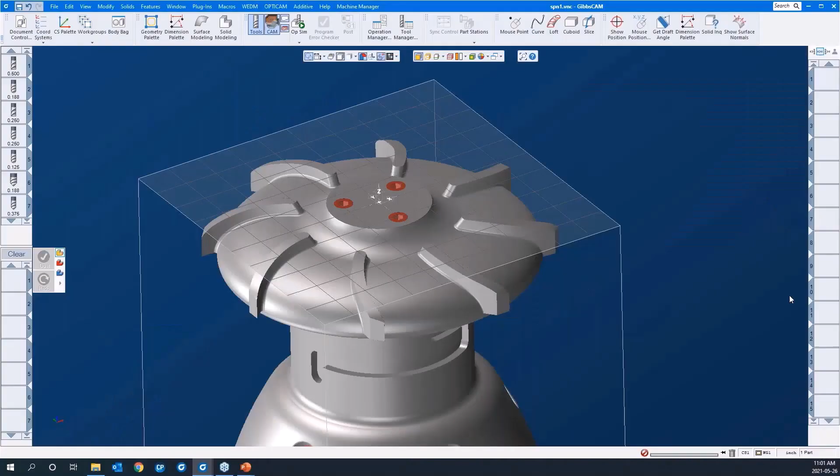We're going to be looking at the 5-axis module today for simultaneous machining in GibbsCAM. Let's open up a 5-axis process to start. Before I create a toolpath, we'll just look at the process dialog for the 5-axis module.

This is the options tab. It has your speeds and feeds, and you can duplicate and rotate toolpaths, which CS you're going to be machining in. GibbsCAM 5-axis supports 3D cutter radius compensation, so you can adjust the toolpath at the machine for size.

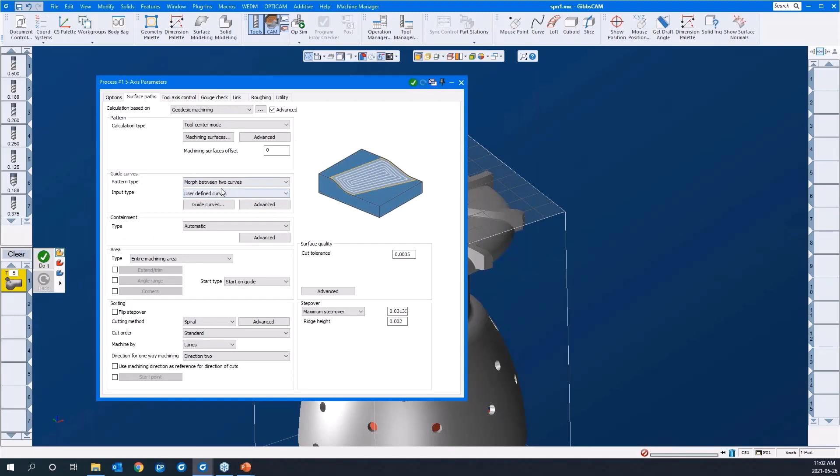If I click on the surface paths, you'll see that GibbsCAM is very graphical in the 5-axis module. You'll see any field I click on, a diagram appears to let you know what the system is expecting. And that's right across the board, almost any field you click on. So it's very graphical, and it's a joy to use.

Okay, you'll notice I'm in tool axis control. And we'll be machining in full 5-axis simultaneous. You can also go 4-axis simultaneous, or you can lock both rotary axes and machine in 3-axis as well, in XYZ. So we'll be looking at that as well.

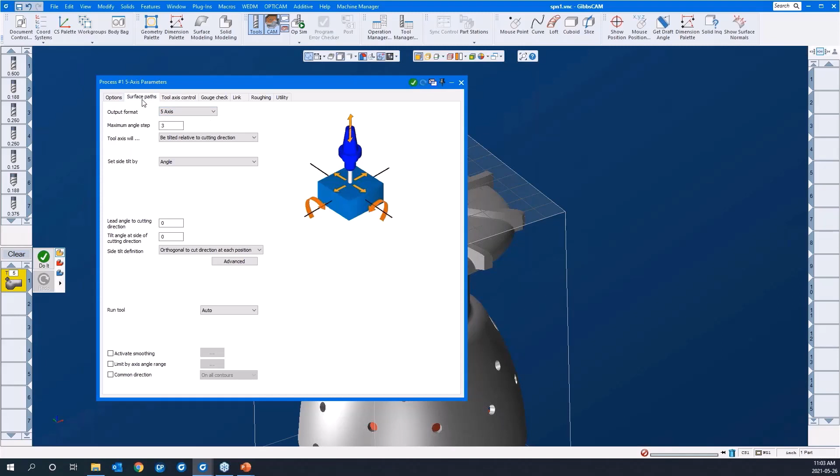Also, there's a lot of power to the 5-axis simultaneous machining strategy in GibbsCAM, and a lot of depth to it. If I just go over my calculation based on, if I'm selecting surfaces, there's a series of sub-options here for different toolpath options. If I select triangle mesh, you'll see there's another subset of toolpath options. And if I go to wireframe, you'll see likewise.

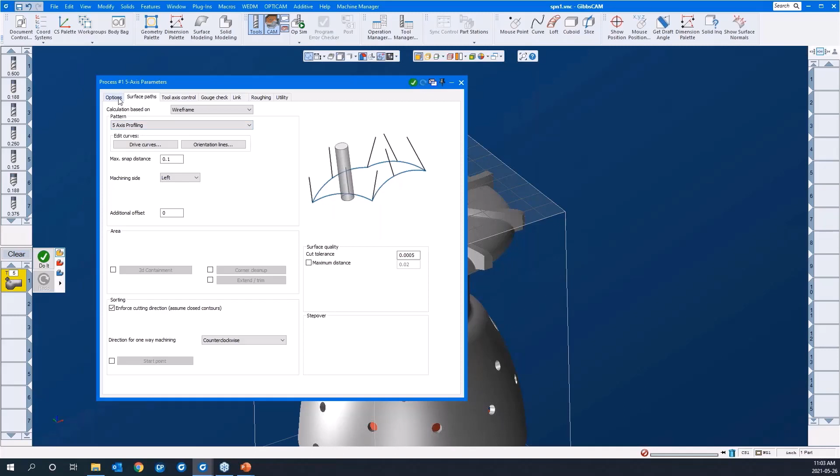So there's very many options here, okay? And we're going to cover a few of them here today. If I go back to options, you'll see there's a whole other set of toolpath options here as well. They're pointed 5-axis strategies, and we'll look at least at the drilling one today.

Let's go ahead and create a toolpath. Okay, so our options tab is good. We're set like this. I'll go to surface paths, and I'll select surfaces to start. We'll go morph between two curves. I'll just select the first curve like so.

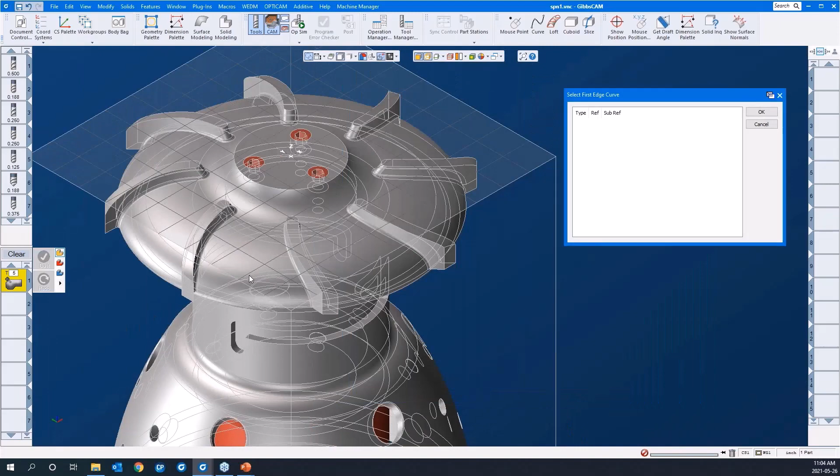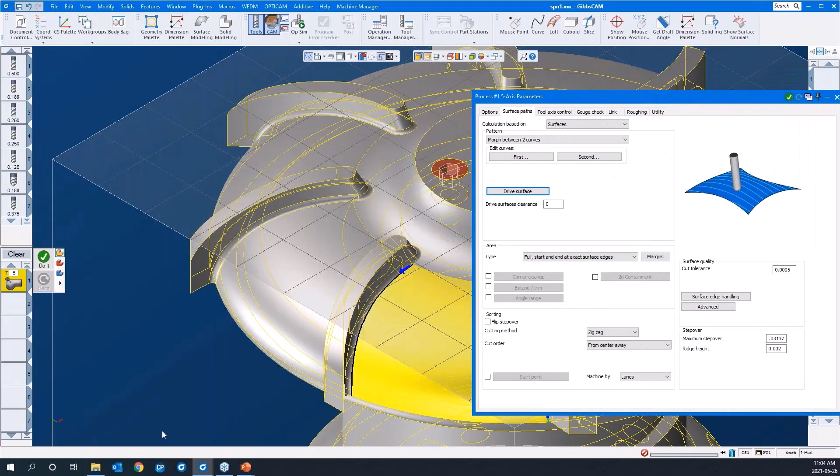And I'll say okay. The second curve will be in here. And then the drive surface, the surface we're actually going to be machining, is this one. So those morph curves are containing the toolpath, and we're going to be machining onto the yellow surface here.

Start and end at exact edges, meaning the tool is going to travel right up to these morph curves that we've selected. But if we did that, it would perhaps overcut. So we can go to margins and add the internal tool radius, which is the radius of the tool we're using, which in this case is an 1/8" ball mill. So that'll shift the toolpath over by that amount.

We're going to cut a zigzag toolpath, and we'll just use a standard. So it'll go from the left or right based on our decisions. There's the machining tolerance. We'll keep the step over rather coarse while we're developing the toolpath. It'll calculate quicker. And once we're happy with the toolpath, we can tighten up our step over to create a nice surface finish.

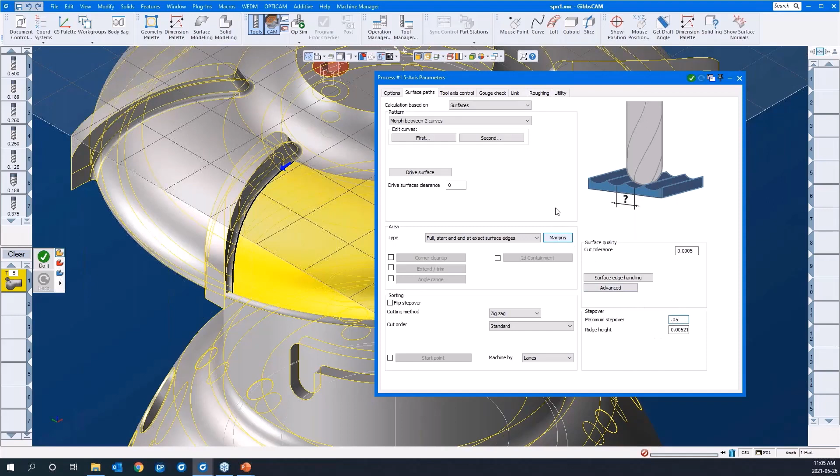In tool axis control, we'll select full 5 here. There's dozens of options to control the tool axis in relation to the surface it's cutting. By default, the tool axis wants to stay perpendicular to the surface it's cutting. And for many reasons, you can alter that by adding a lead or a lag angle or a side tilt as well. And we'll discover them as we go.

The gouge check protects the part from the flutes where required, or the shank of the tool, or the arbor as well. We'll come back and look at that where required. We typically only apply gouge check strategies once the toolpath is created and we see that there's a problem, when we need the tool to move away from any given feature.

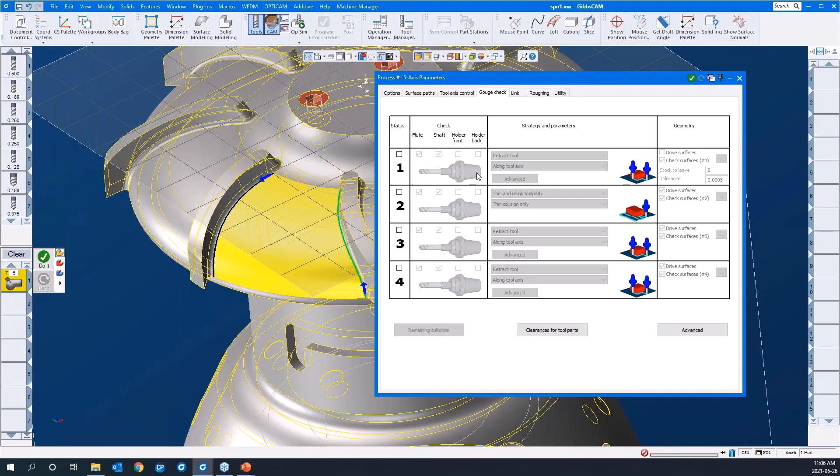The link tab is a very important part of the 5-axis module. These are important components of the toolpath. This is our first entry and last exit, okay? So the lead in and lead out. Gaps along cut are very important, okay?

What is a gap along a cut? Well, this diagram kind of displays that. If the system encounters a gap, do you want it to go direct or follow a surface, or it can blend spline, or it can start retracting to different feed or rapid moves as well, okay?

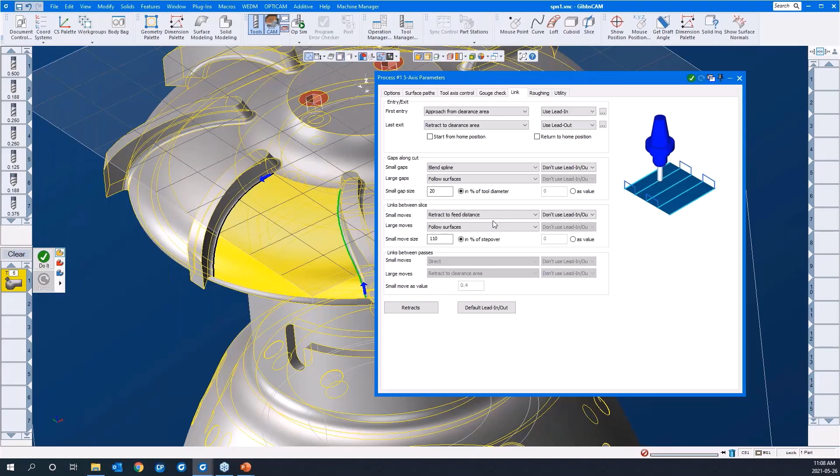And then you can differentiate between a small gap and a large gap and have the system behave differently based on those. Another one that's quite important is these links between slices. Well, what is a link? A link is the little piece of toolpath that joins the entire process together. So if you have a zigzag toolpath, there's a little piece of toolpath that links it together, and that is called the link as well. So you can go direct if you choose, or again, some of the similar options. If it's a far distance, you can have it retract to a feed distance or a rapid distance, and so on and so forth.

Okay, again, you can differentiate between a small move and a large move. A small move, you may just need to follow the surface, but if it's a longer distance, you may want it to retract to a clearance area. So there's many different retract options, and they're all defined in here, their depths, okay? There's clearance area, which is the initial clearance plane. There's also a rapid entry and exit, and then a feed entry and exit, and then a rapid distance here as well. Okay, and we'll explore these as we go forward.

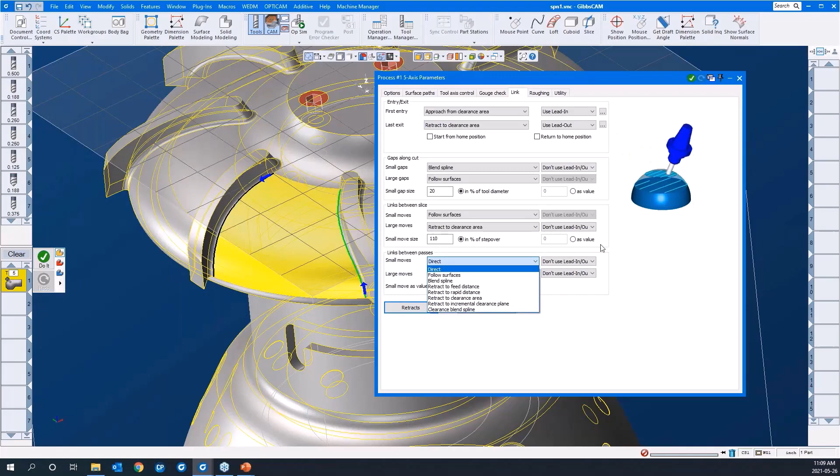There's also a roughing tab. By the way, in the link tab down here, links between passes, you can do multiple passes, and then the same options appear here for how to get the tool from the end of the first pass to the beginning of the second. It's grayed out right now because we don't have any roughing strategy selected. If we come here to roughing and click any one of these, go back to link, you'll see that it wakes this up. You can see the different pass levels here.

Okay, so to create our toolpath, we have our edges selected, like so. We're taking 50,000 step overs. Our tool axis control was full 5. We had no gouge check strategies on. Our link tab, links between slices, I was just going to say follow surface and follow surface in both instances. Let's go ahead and create that toolpath. Okay, down here in the lower right is the progress bar. There's a little thumbtack there. I like to keep this open during my session so I can see how long it's taking for toolpaths to calculate.

Okay, so there we are. You can see there's the shift from the edge. That's the internal tool radius. We have a lead in and lead out option selected here, so I can modify those. If I go to the link tab, yes, we're using lead in and lead out. If I go to my default lead in and lead out, I can modify them here. Vertical tangent arc, I'll make them a little bit bigger like that, and I'll shift it over to the lead out just by clicking that button. I'll say okay, and we'll just hit the redo button.

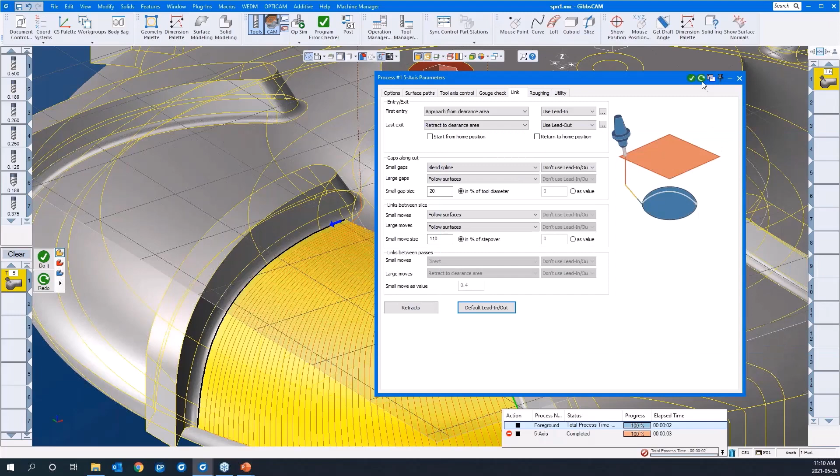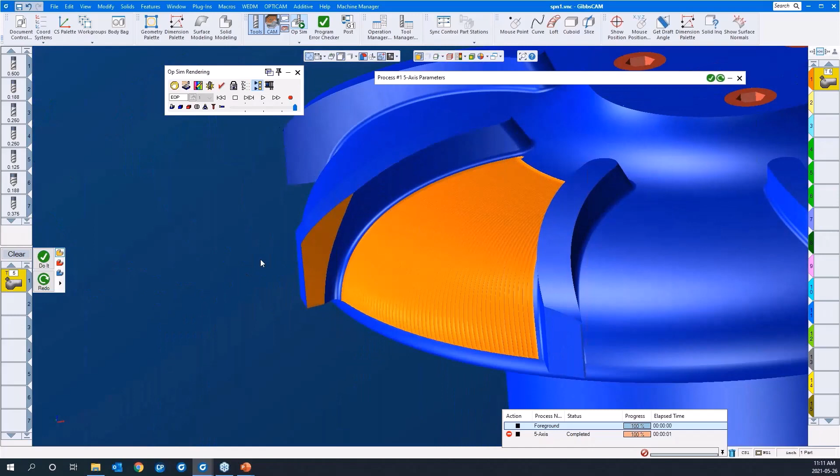Okay, let's run the simulation here and have a look-see, and away we go. Okay, so this is OpSim right here. You can see right out of the gate that it has offended the blade there. And the step overs are rather coarse here. While we develop the toolpath, I'll keep the step overs rather coarse, and then we'll clean them up as we go. We'll see how it behaves coming up to the side of this blade here. Okay, so it seems to be clearing that one. This is our problem right now.

So we'll add a gouge check strategy here. I'll go to gouge check. I'll select it. I'll check the flute and shaft. Okay, there's three main gouge check strategies. Retract tool: you can retract the tool along the tool axis, along any of the machine axes, or from any reference point you choose. It's quite versatile that way.

The next main one is you can tilt the tool. You can use a side tilt, which is a tilt angle perpendicular to the travel of the tool. Or you can use the lead lag angle, which is along the length of the cut as well. Or you can let GibbsCAM take over and say, do automatic. Well, in our case, we'll go side tilt. We're gonna have the tool tilt perpendicular to the direction of cut. The parameters are, you can limit it to a maximum of 90 and minus 90. We'll just leave that as it is.

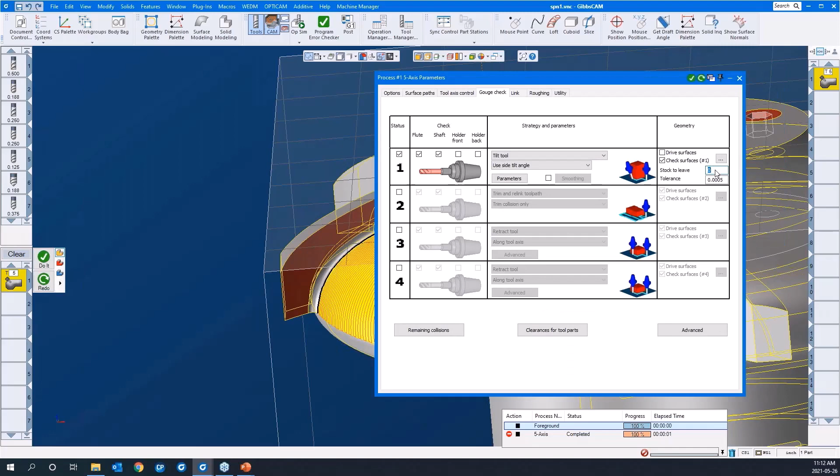What surface are we gonna check? I'll just pick here and select the surface we wanna protect, is that one. We'll say okay. And we'll leave an amount on there. We're gonna have it miss by, we'll say 50,000. I'll say redo.

And you can see there's a little jog in the toolpath, and let's look at the simulation. See how that behaves. I'll slow it down a little bit, hit play. So it comes down and you can see the tool is actually missing there. Okay, while it's running simulation, you can single block it at any given time. You can put the tool holder on there as well.

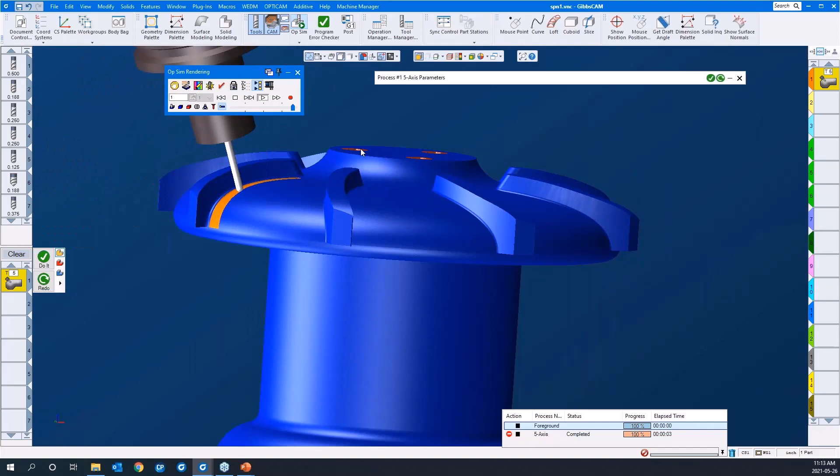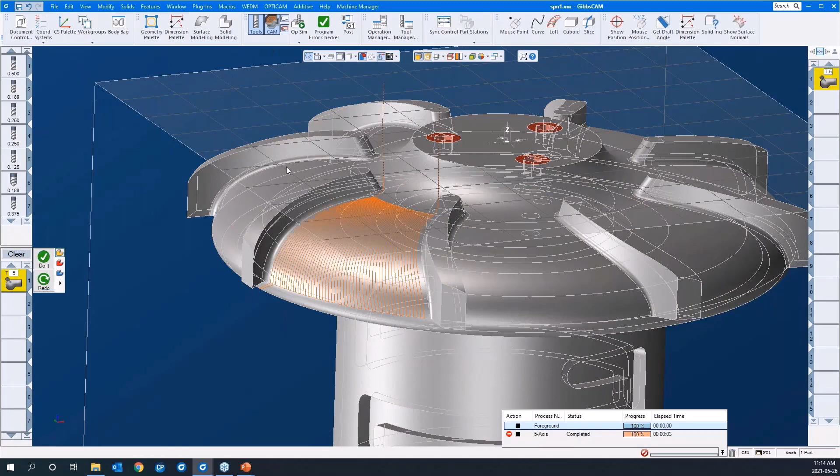Okay, and as we go through and I show you the 5-axis, I will describe some of the features available in OpSim and in machine simulation as well. Okay, so we're milling with the end of the tool here. A lot of the 5-axis module is end milling, but there's a very important component to 5-axis, and that's side milling. Swarf milling they call it, side wall axial relief feed. So let's do that. We will side mill one of the blades here.

Okay, in this last toolpath, I used the edges of the solid to select. You certainly can do that, but you can also use geometry that you have extracted from the solid. And I can do that in this case here. I'll create another 5-axis strategy. I'll use the same tool. Cutter comp is on by default. I'll turn it off until required. Surface paths. This time we're going to go swarf milling.

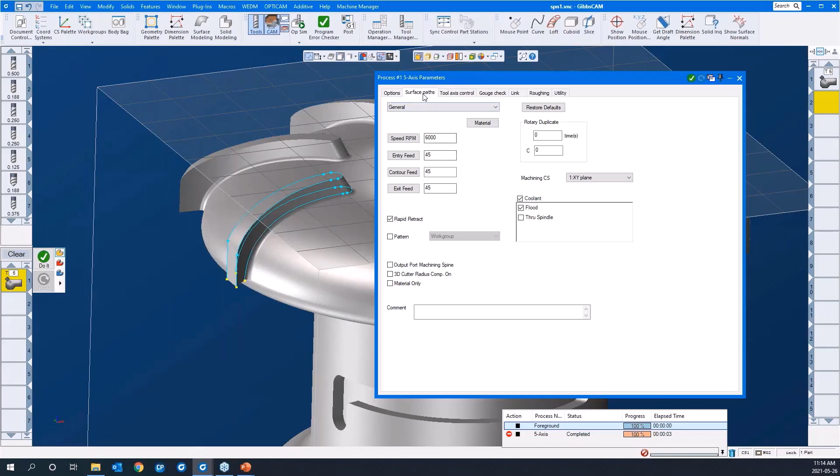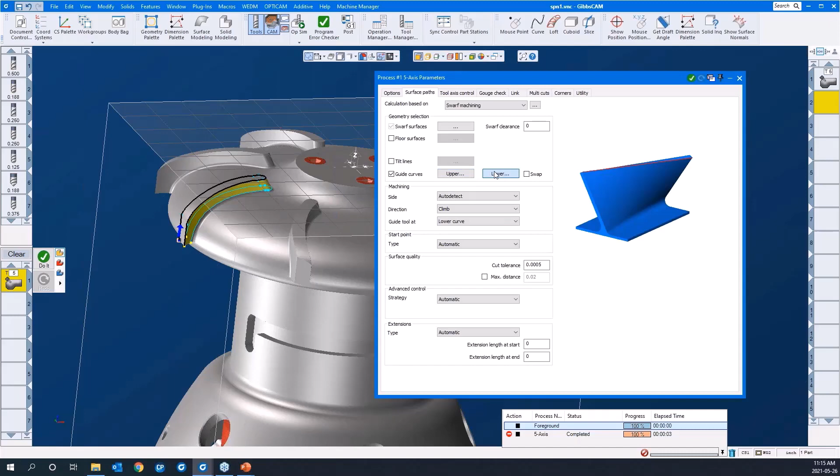Our swarf surfaces will be the walls of the blade. This one. Like so. I'll say okay to that. Okay. We'll use guide curves, which is the geometry. The upper curve will be the one on the top of the blade. And the lower will be this one. Okay. I'll say okay.

The system will auto detect which side of the surface it should cut on. It's going to guide the tool at the lower curve. The start point is predetermined. We can change that. There are our machining tolerances again. That affects the quality of your toolpath. Advanced control, we can let it go automatic, or in this case, we're going to sync the toolpath with the upper and lower curves. We can add an extension on the beginning and end of the toolpath.

We'll look at that. Under tool axis control, full 5, yes. Gouge check, we'll just leave it as it is. It's going to check the guide curves already. Okay, there's a lead in and lead out already defined here. We can remove them. If we say no lead in, lead out, you'll get an axial entry and exit. So just a straight line in. And you can do it in multiple passes. We're going to do it in one pass here. I'm going to say do it.

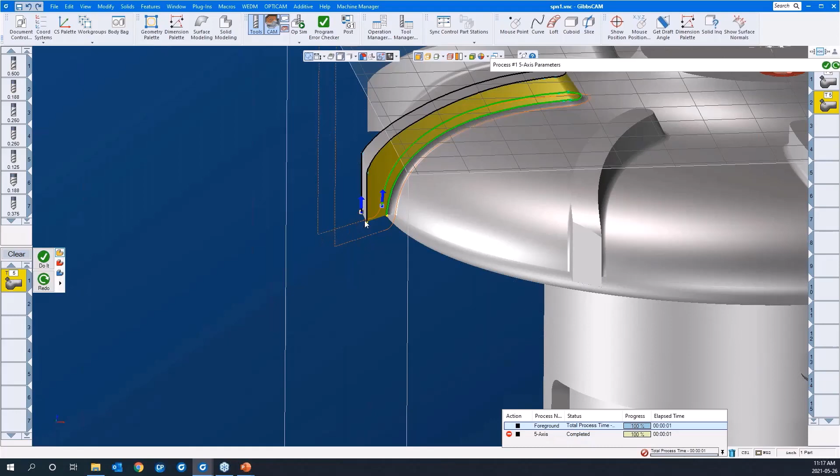Like so. There's a clue when you're developing 5-axis toolpaths on the entry and exit line. These lines right here. With a bit of practice, you'll understand that this represents the axis of the tool. So it gives you a clue as to how the toolpath is going to approach and leave the cut. Let's have a look at this one. I'll just turn off the holder. Sometimes it's nice to have it. Other times it might impede your view a little bit. Something like that.

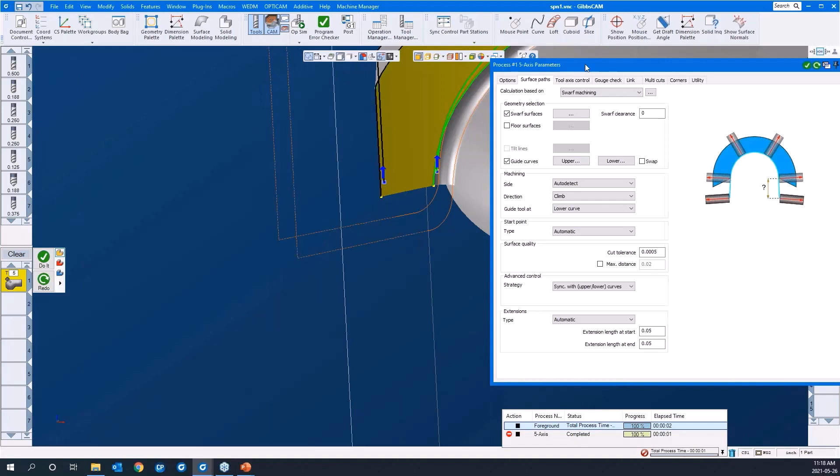Okay. You may consider extending the toolpath a little bit here. I'll go back to surface paths, extensions, the start and end. I'll just extend it by 50 thou at the beginning, and that same 50 thou at the end. I'll just say redo. You can see the difference there. At any time, and I'll do it on the next toolpath, you can duplicate and rotate that around. There's no need to go around to each blade and do them separately. You do one and then you copy, rotate it around, like in other environments in GibbsCAM.

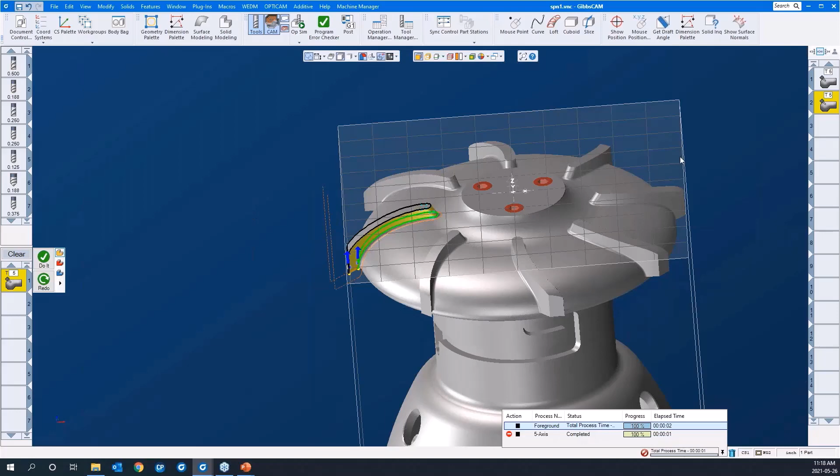Okay, let's go back to Op1. We were saying that it's a full 5-axis strategy, absolutely no problem. But you can also lock a rotary axis or lock 2. So let's look at reusing the data that we did for Op1 to cut the top of the blades. To simplify my view here, I can turn off the grid and the stock cube. Let's go in and modify the data in this process dialog to do some 3-axis milling. It's basically going to be a 3D toolpath option, XYZ.

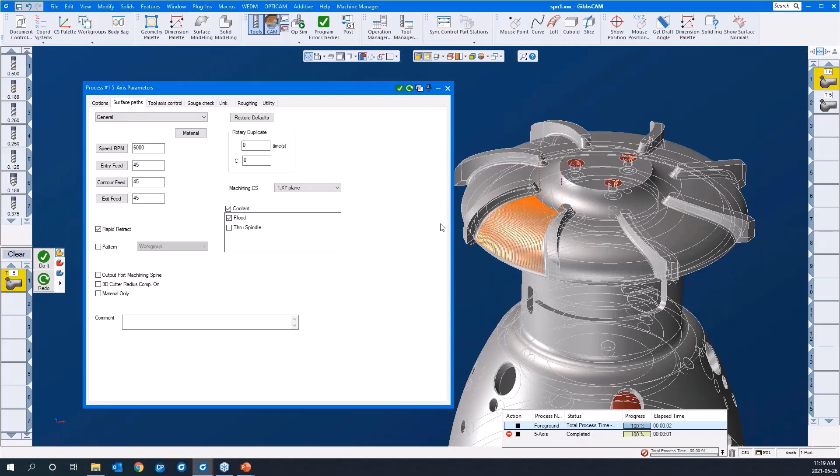I'll go to surface paths. And we'll select morph between 2 curves. The first curve will be this. And I'm picking wireframe from the solid again. The second curve, this one. Like so. The drive surfaces in this case will be these 2. We'll start and end at exact surface edges, except this time I'll remove the margin option so that the tool does go right to the edge and doesn't stay off it by the radius of the tool.

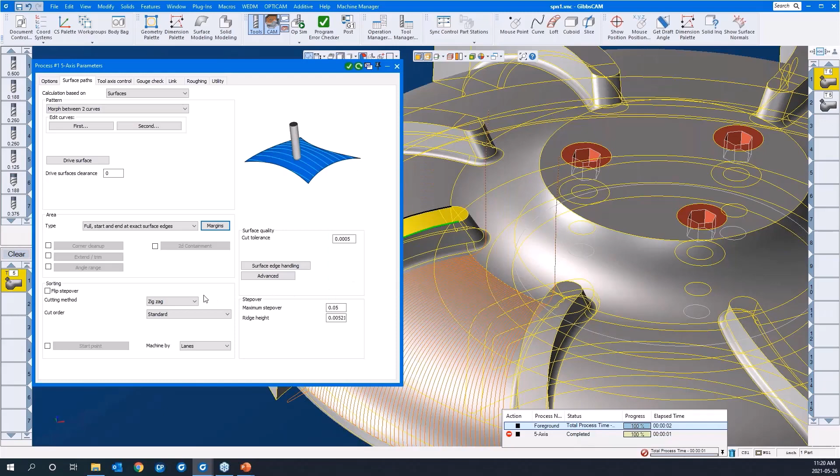I'll say okay there. We're zigzag machining. I'll set the step over to 25 thou. Okay, so you can do it by step over or by ridge height for surface finish considerations there. One drives the other.

If we go to tool axis control, we're going to take it down to 3-axis. If that's the case, you can machine from the XY plane, or if you click other direction and you have a coordinate system created, you can pick the CS that you want the tool to approach from and cut on. So in effect, it's 3+2 machining or 5-axis positional milling. We're going to go by the top, which is the XY plane or CS number 1.

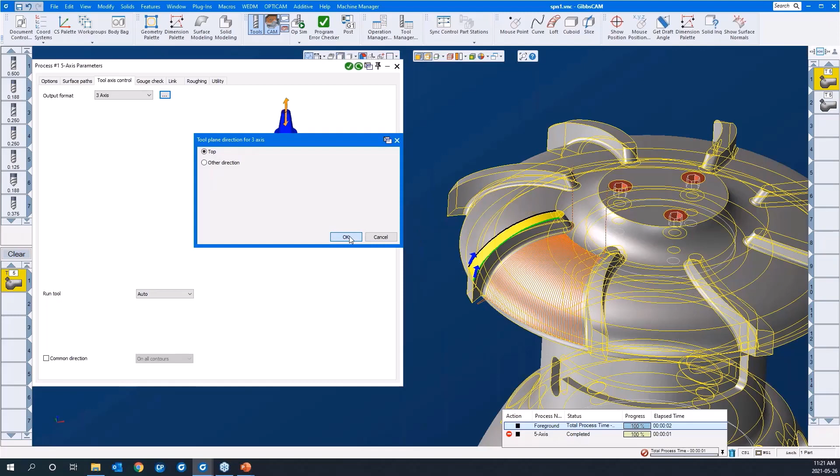Gouge check. Until we need it, I will turn it off. The link tab, again, we'll leave as is. We'll create the toolpath and come back and modify as required. At this point, I'm going to create the toolpath. I can watch it run here in my progress bar. It ran rather quickly. And you can see our toolpath here. First of all, you see that the tool is now exactly on the edge.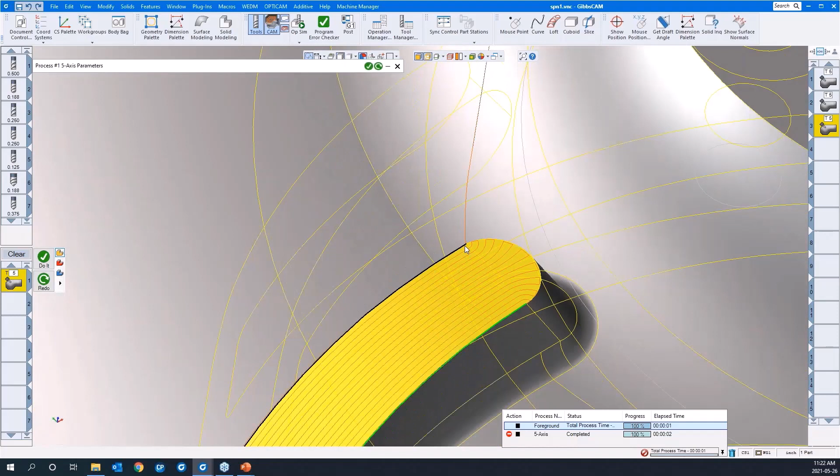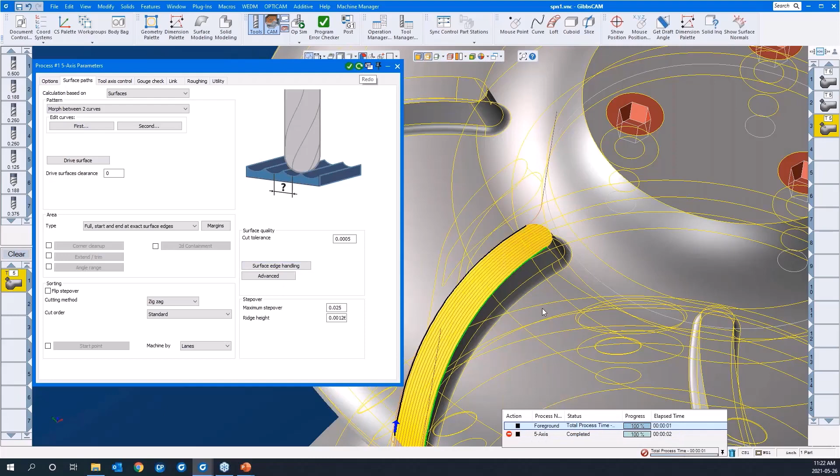I see a problem here where once the toolpath leaves the containment of these morph curves, the toolpath starts to flare out like that. So what we can do is we can virtually extend the morph curves to the end of the selected surfaces. So if I go to surface paths and surface edge handling, extend edge curve, and I'll say okay, and say redo. Okay, so that straightens that up pretty nice. If I go to a top view, we'll get a good look at that.

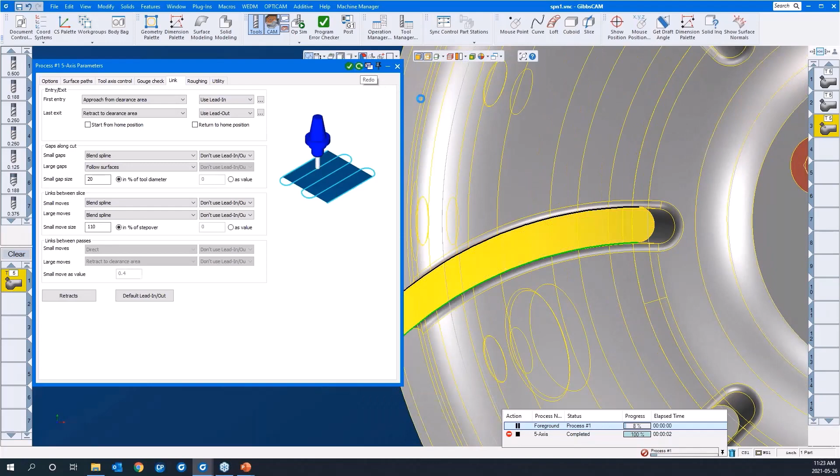Some other improvements: these are the links we were talking about. They're important components of the toolpath. And you can see that there's an abrupt change of direction there. So we would rather, where possible, have a nice blended curve in there. So if we go to the link tab, and knowing that there are links between slices, instead of following the surface exactly, we'll say blend spline in all cases in this toolpath. I'll say redo. You'll get a nice rounded curve there.

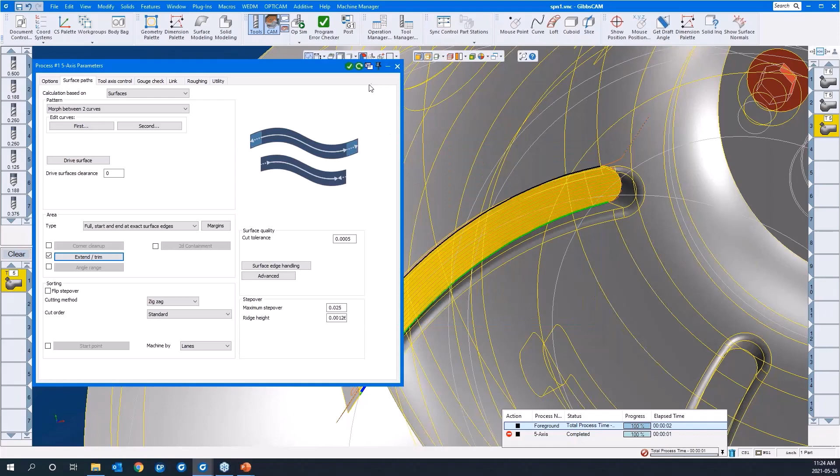One last thing you could do, just for safety's sake, is have the toolpath push out beyond the surface. In surface paths, you can come to trim extend, and I'll extend the stroke of the toolpath. This is along the stroke. This is across the sides. Along the stroke, I'll extend it by 25 thou on both ends. And say redo. Okay, so it just pushes it out there a little bit. I'll go to a nice ISO view.

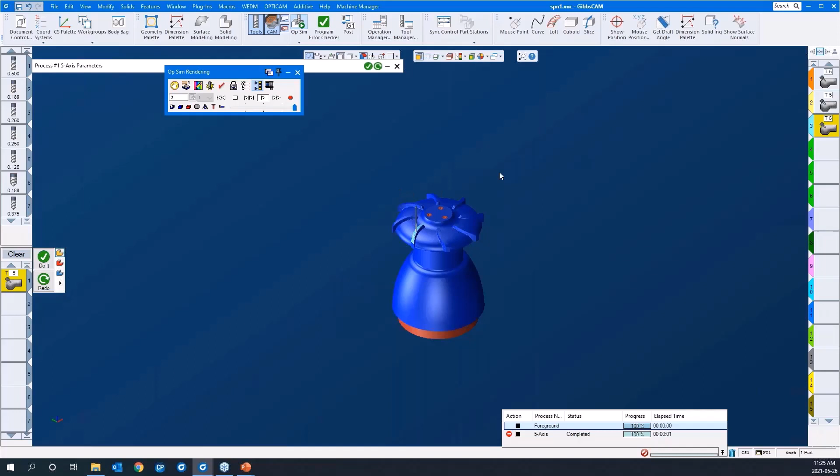One more thing we can do here is I'll go back to the options tab, and we can duplicate this toolpath 7 times over 45 degrees and say redo. Like so. I'll just run the simulation again. And hit play. Away it goes. Of course, I would do that at the end to all of our operations so that the entire part was cut. Okay.

I'll turn off edges here. So we've been creating toolpaths from scratch here. We've been building them up. In GibbsCAM, we have the ability to save these processes off. We can save all of the manufacturing data in here, your speeds and feeds, the different toolpath parameters. It also saves the tool off. So it's suitable for similar parts. If we were cutting similar parts, we could have a series of processes available for that. So we're going to use those and it'll speed up our toolpath creation.

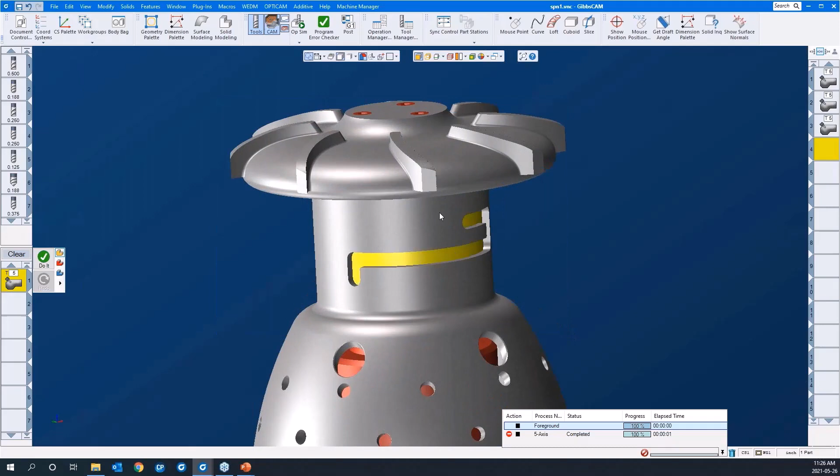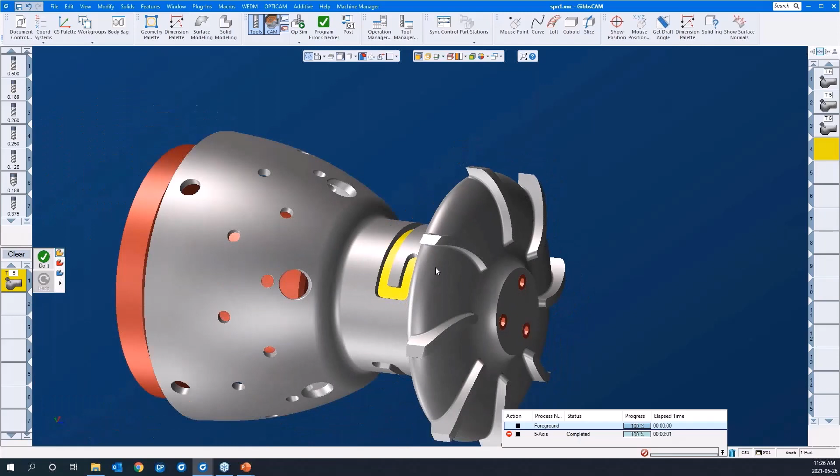Okay, we're going to look at this radial slot here. This is a 5-axis machine. It has full 5-axis on it. However, if we were to rotate the part along the trunnion axis 90 degrees and access this slot, in a sense, we're now on a 4-axis mill. Although this is 5-axis, this certainly can be done on your 5-axis or your 4-axis vertical mill, or horizontal for that matter.

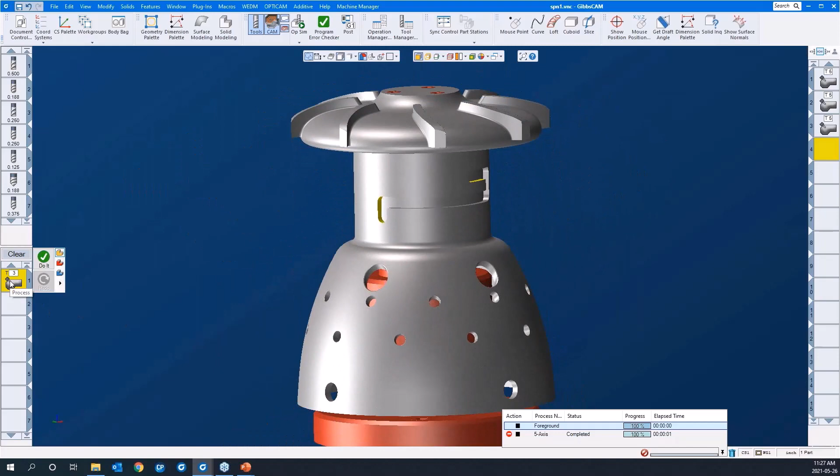Okay, so I'll load a saved process. I'll go load process, and I have one here called multi-axis rough. We'll let it load up. It's using T3, tool 3, which is a 1/4-inch end mill to cut this feature. We can measure the width of this slot rather quickly. I'll just measure across the width of the slot, and the slot's 3/8. So our 1/4-inch tool should fit the bill for a very quick and effective roughing strategy here for some of our 4-axis work.

We'll set our speeds and feeds. I'll go to surface paths. Okay, we're multi-axis machining here. We're roughing, which is interesting. One of the options within the 5-axis module is offset milling, which is typical roughing. It also supports adaptive roughing, with all the high-speed machining ability of other high-speed machining strategies, such as all the curves and the corners and the micro lifts. So you can do some effective roughing. In this case, we'll stick with offset milling.

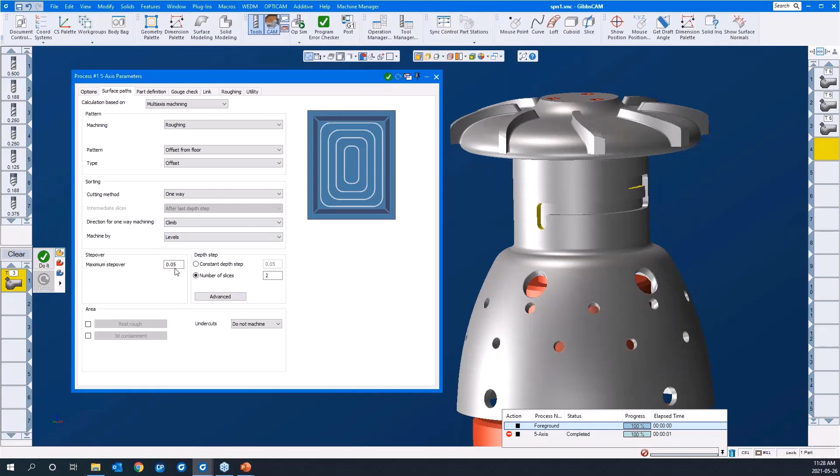We're going to cut one way. We're going to climb mill. The step over will be 50 thou, we'll say. Number of passes, 2.

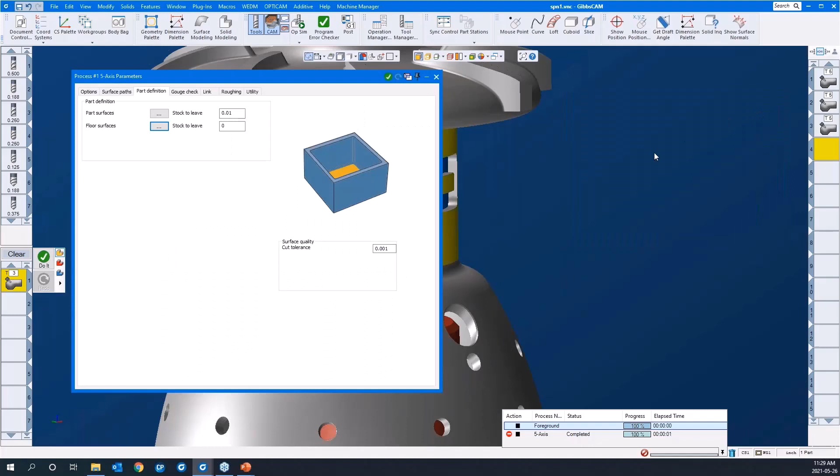Okay, let's define the part. The part surface will be the cylinder that we're cutting. Okay, that defines the boundary of the feature we're cutting. I'll say okay. We're going to leave 10 thou on all surfaces there. Our floor surface, I'll pick it and say okay. Gouge check where required, link tab.

Okay, we're going to have to gain entry to this slot, so we'll use a helical ramp in. Before I define what gets ramped in, I'll go to the roughing tab. We'll use helical. We'll say a 2-degree ramp angle, and the helical diameter will be 25% of the diameter of the tool we're using.

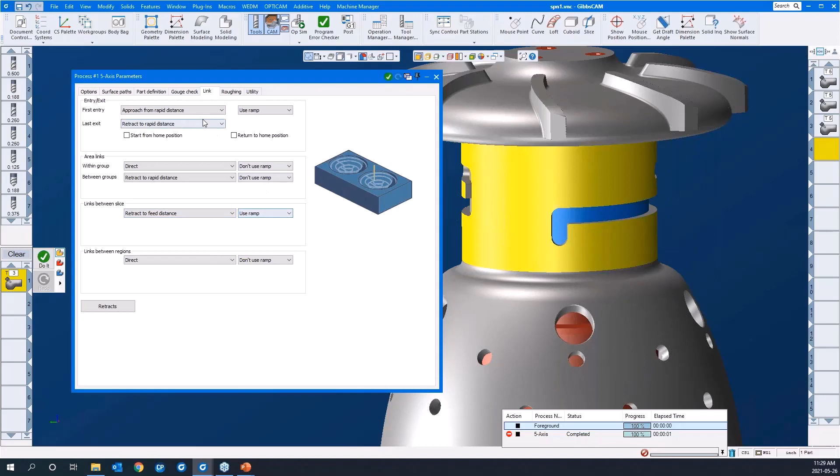Knowing that there's 2 Z depths or 2 passes that it's going to have to cut, the initial cut depth, we're going to use that ramp, yes, and links between slices or passes here, we're also going to use the ramp. I'm going to say do it. Okay.

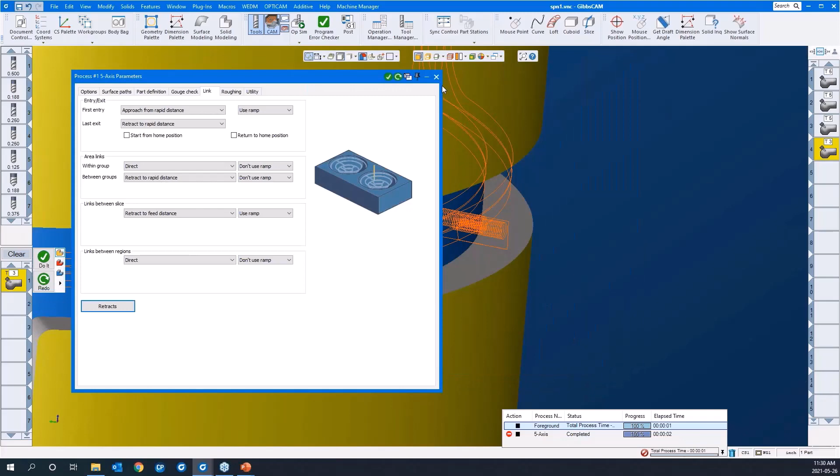So it's using the ramp, and then these distances, we want to keep them pretty tight. The initial one's using the rapid distance, and this is using the feed distance. So I'm just going to make sure that they are close to the part, but still clear. Okay, I'll create a finishing cycle here, and then we'll run these 2 operations in simulation.

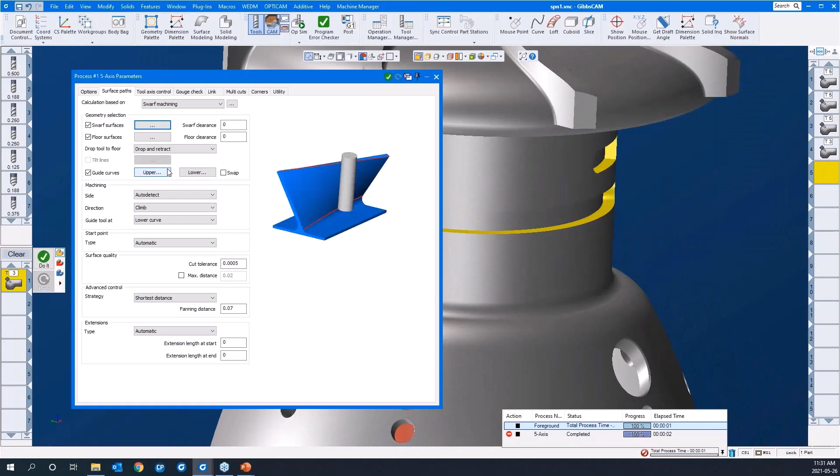So like we did 5-axis swarfing, we can do 4-axis swarfing here as well. I'll swarf the slot with a 4-axis process here. I'll go to surface paths. The swarf surfaces will be the walls of the slot. I'll go select tangent faces and say okay. Floor surfaces, yes.

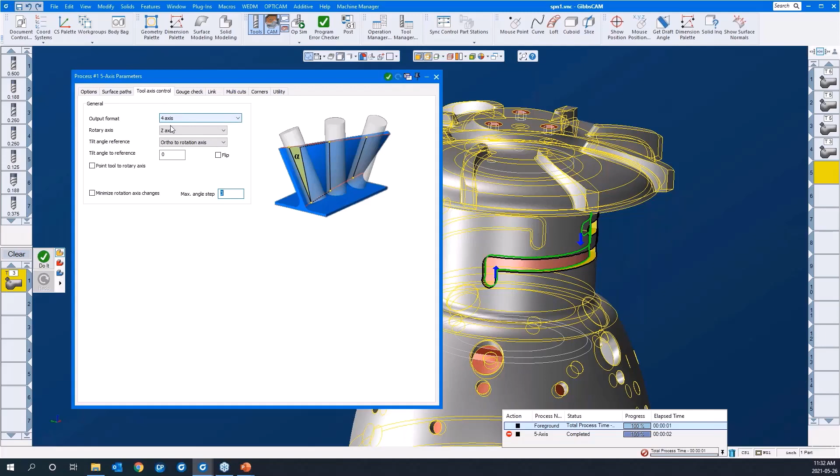And then guide curves. For that, I'll turn my edges on. My upper curve. The lower curve. Okay. In this case, we'll go advanced control. Instead of syncing them, we'll go shortest distance here. Tool axis control, 4th axis. When you select the 4 axis, then you have to tell it where the rotary axis is, and it's along the Z axis of the part, so we're good there.

Okay, this is going to go off center. Why? That's a big question when you're doing 4-axis milling. Of course, the 5-axis module supports off-center Y machining. If you wanted something more like polar and cylindrical, where the tool always pointed to center, the button for that is right here. If you clicked on that, it wouldn't effectively machine this feature.

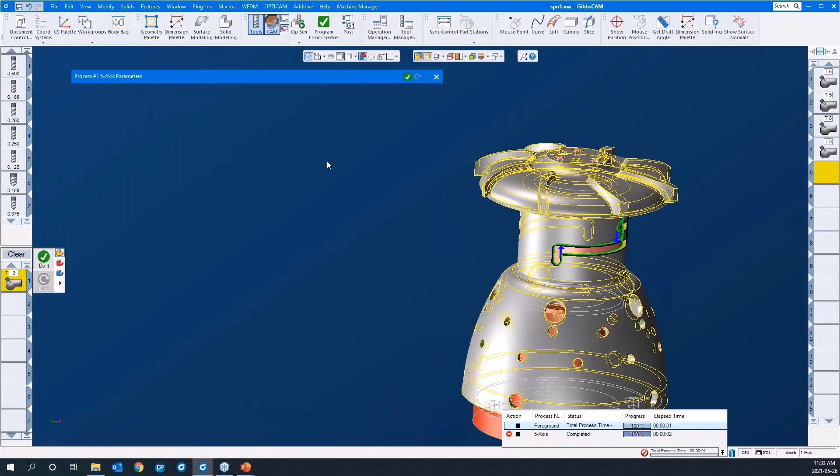Multi-cuts. This is a finishing pass. We're going to do it in one shot. And we just want to make sure there's an effective lead in and lead out here, so yes, we're going to use them. We'll go with a horizontal tangent arc, and I'll copy that over to the lead out and say okay. I'll create this toolpath. Okay. Let's run both of those in sim mode.

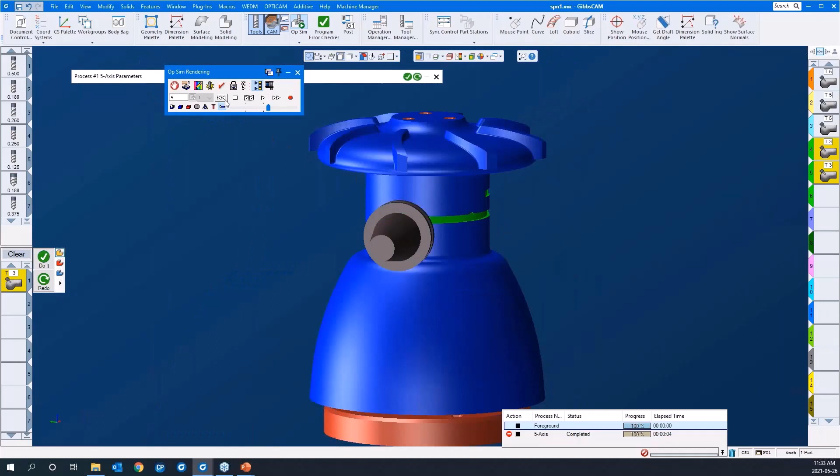Okay, so as you see right now, when I run opsim, the tool rotates and the part stays fixed. I'll put the holder in and hit play. So it's helixing in to depth here, okay? So you see that happening. If you want a more realistic view of how it's going to appear at the machine, you can change the POV lock here from fixed part to machine.

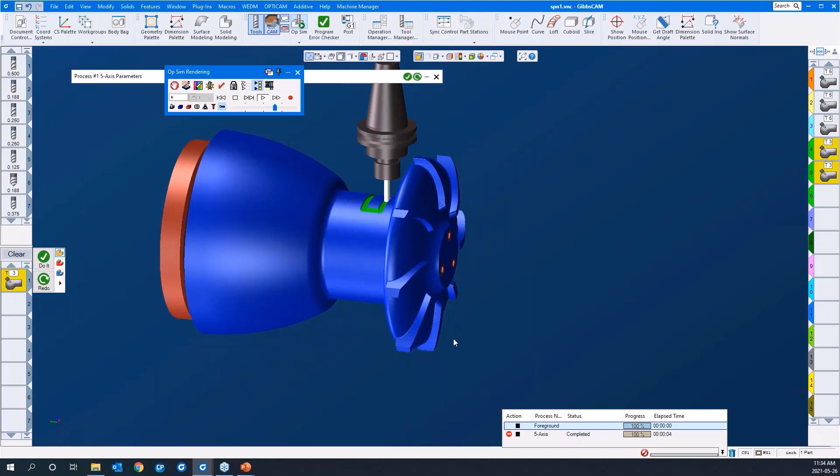Okay, and then we'll run it again, and now the tool will remain fixed and the part will rotate. There it goes. Okay, at any given time, there's a show position dialog in opsim that's kind of interesting. You can click on this, and there's sliders to control. I can lift the tool manually in Z, lift it up out of there.

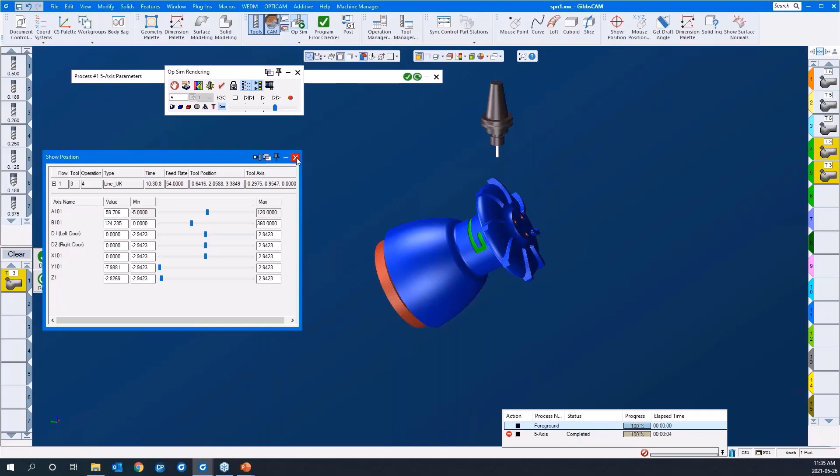And then I can determine my B axis is the rotary axis, and the A axis is the tilt or trunnion axis here. Okay, while we're doing all this, there's full collision checking. If the tool rapids into any material, that's considered a crash. If the tool holder touches anything, that's also considered a crash, and the simulation will warn you. So in the next toolpath, we'll have a look-see, and we'll use not operation sim, we'll use machine sim.

Okay, let's get ready to create a new toolpath here. I'll turn off my edges again. So we're going to do some 5-axis drilling on these holes here. We know nothing about them right now, so we can just study the solid.

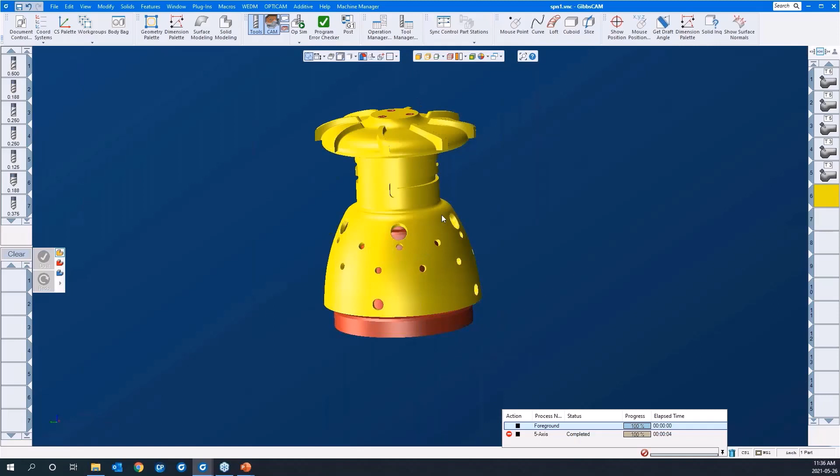In combination with the 5-axis module, we can use the hole manager. I'll select the entire model and run the hole manager here, turn it on, and run auto feature recognition, giving it a moment to go through the model.

Okay, it's identified them all. There's a hole feature for every hole now. Some of you who use GibbsCAM may already use this feature. We're going to use it in combination with the 5-axis drilling. If you want to find out about something, you just click on it and it tells you right here, oh, this one's a bolt hole. You can see about it. If you want some specific data about it, you can right click on it and go edit hole.

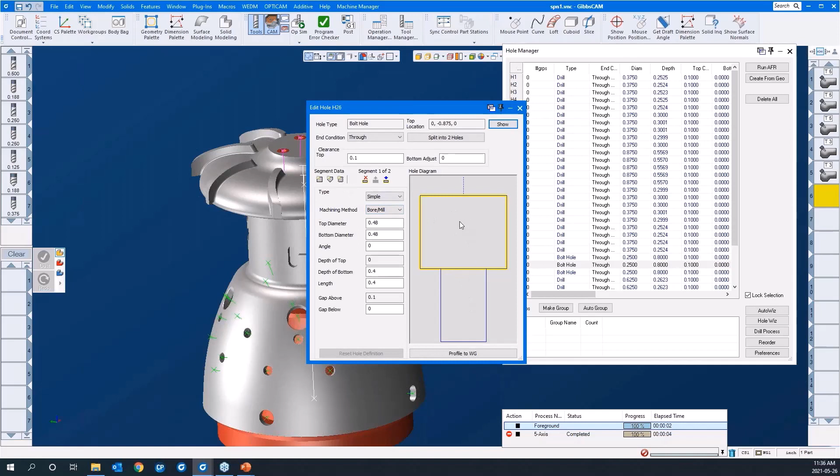You can see it's built from 2 segments. They call it a bolt hole, or a counterbore hole, yeah, like that.

There's a series of other ones in here. We can group them together now and then toolpath them all at once, drill them, or what have you, all at one time. So I'm going to group them by diameter. I'll select this 3/8 hole and the rest of them, and I'll say make group.

I'll just give it a name, something descriptive, something like that.

What about these ones here? There's these bigger holes here. You can pick on them, diameter 875, so they're 7/8 diameter. I see 5 of them that are the same, so I'm going to group them as well. Give them a name.

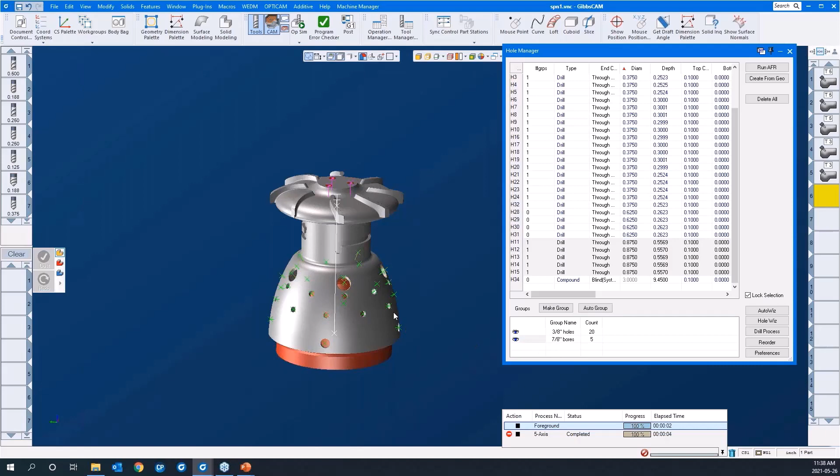Okay, so we're all set to go. When you need to select them, you just pick them by group, they all highlight. So we're good to go.

I'm going to build up a process, grab it from our saved processes. I'll go with helix bore. All of the drilling options available in the drilling process in GibbsCAM are available in 5-axis drilling as well. So we're picking drilling here. Under drilling options, we have drill, mill bore, tap, rigid tap, your pecking options, and so forth.

Okay, we're going to go helix bore in this one. We're machining from the feature, so we'll be using the data in here. We want to concern ourselves with the bottom of that hole because we want the tool to break through the bottom. So there's some modifiers here. We're using the feature to create the toolpath. We're going to adjust so that the tool starts 50 thou above the feature and the entire depth breaks through the bottom by this amount, to full diameter depth.

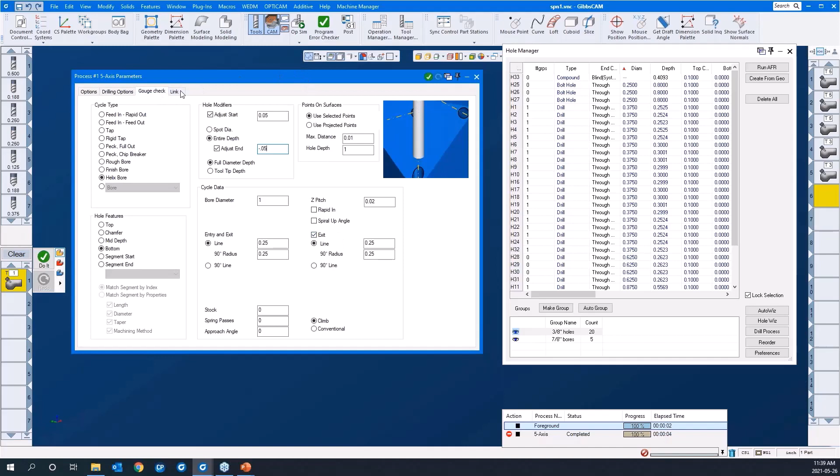There's a gouge check and a link tab as well. Let's create the toolpath and see if they're required. I'll pick the 7/8 inch bores like so and say do it. It's as simple as that.

Okay, it doesn't create a coordinate system. It supports, well, when we get to the drilling, it'll support drilling cycles as well.

Okay, I'll do another one here. I'll go load process list and I'll peck drill those 3/8 inch holes. Let's have a look here. In this case, we're peck chip breaking. We're going to peck in by 0.15 inch, retract 25 thou.

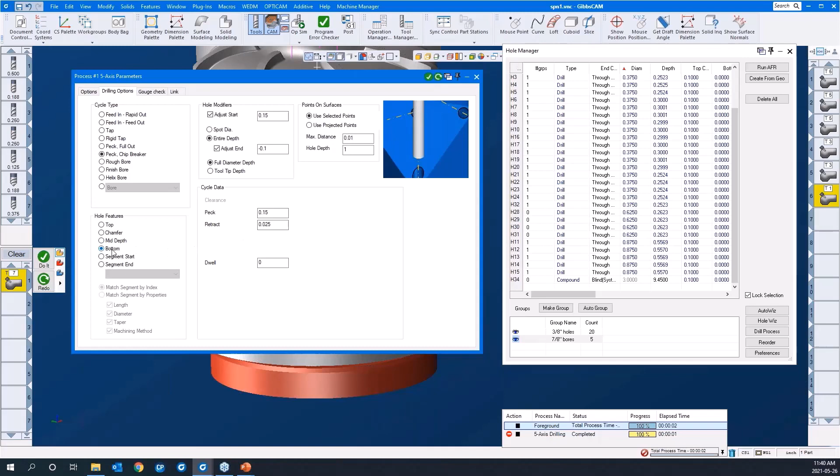Again, we're going to make sure the tool drills through the bottom of the feature. There's an adjustment here as well, like so. I'll select the 3/8 holes and say do it.

So there it is. I mean, it's done in seconds, really. Okay, you can see, without running the simulation, that the tool seems to be moving around quite a bit from hole to hole. There's not a lot of order in that.

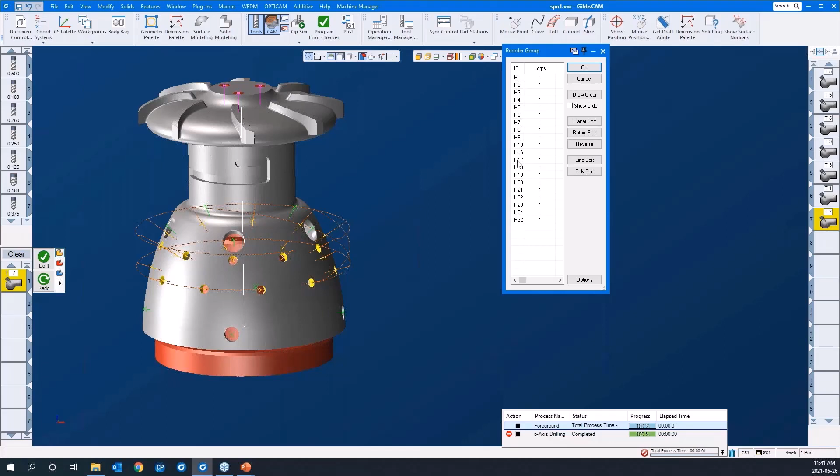So we can reorder the group. Okay, right now this is the order they're being done, basically in chronological order. You can show the label of the features like that. But what we want to do is reorder them.

So I'm going to use a rotary sort because we're rotating the part to drill these. We'll prefer a rotary direction, we'll go clockwise. We're going to sort it around the depth axis and say do it. Okay, you can see where it has reordered them here.

I'll say okay, and we'll redo it. Okay, now you can see only one shift before it gets to the lower ones. Okay, so let's run that.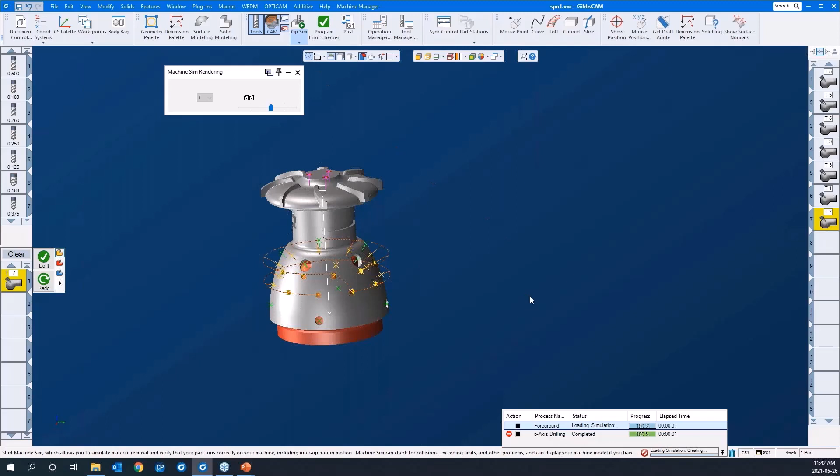I'll just close off the hole manager, and instead of op sim, we'll go to machine sim here. I'll put selected ops on and hit rewind so that we can have it reset. Okay, it's getting ahead of me. There we go, I'll hit rewind, it'll reset the machine up.

Yeah, like that. And I'll hit single block just to slow it down a little bit. Single block it. And away we go.

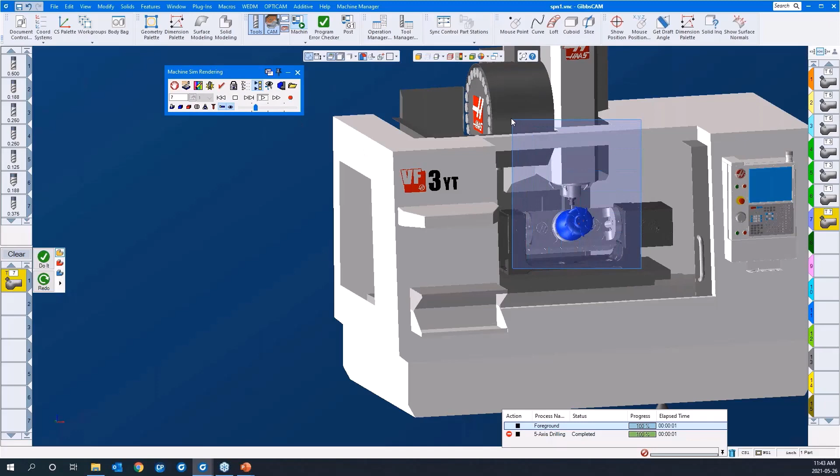Okay, so that collision checking we were talking about in OpSim is also available here, except it's checking much, much more. It checks the spindle against any component or the coolant nozzles. It checks it all.

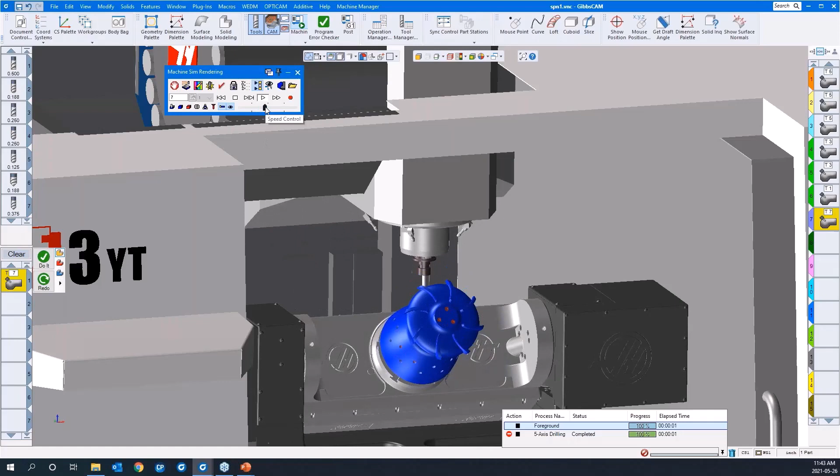If I turn off selected ops, meaning run all of the operations, I can just let that get going here and you'll see that it pops out. Yeah, like that.

Okay, there's a couple other toolpaths I'd like to show you. If you want, you'll keep these hole features, but along the floating taskbar, you can just turn them off so that they're not visible.

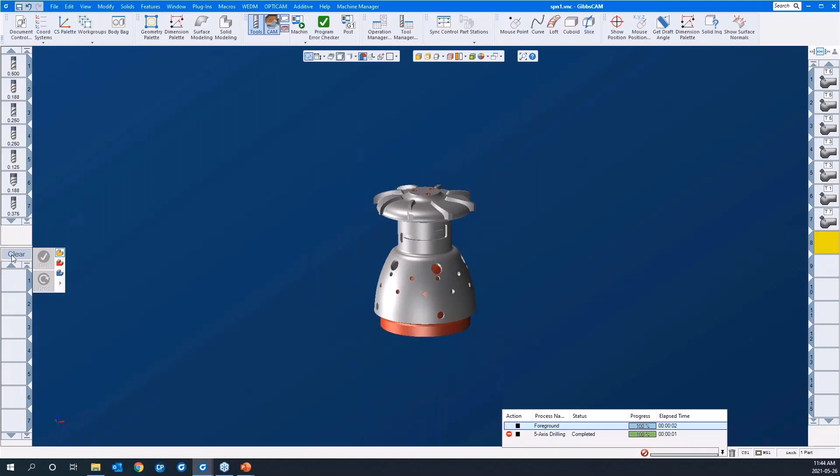There's 5-axis deburring, automatic 5-axis deburring in the 5-axis module. Let's have a look at that. I can pick the entire solid and have it go at it and then exclude edges or what have you. But what I've done is I've created a feature that defines the blades, and we'll have a look at that.

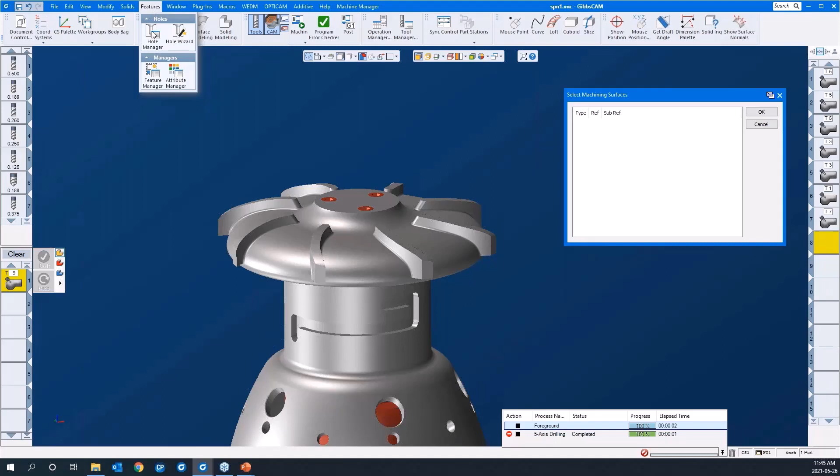So I'll open up the process dialog. Under surface paths, we're now deburring my part surfaces. I'll pick them. I'll open up my feature manager and just pick the blades. I'll say okay.

Okay, you can exclude edges or check surfaces for fixtures, what have you. Here's the size of the edge break. I'll drop that to 10 thou. Under tool axis control here, we can just go full 5, which we are. But you can go 4+1, lock a rotary axis or the tilt axis and go.

3+2, as I was mentioning, for 5-axis positional milling. You can do on a 4-axis mill or just straight 3-axis if you only had a machine with no rotary axes. Okay, we're going full 5 here. It's as simple as that, really.

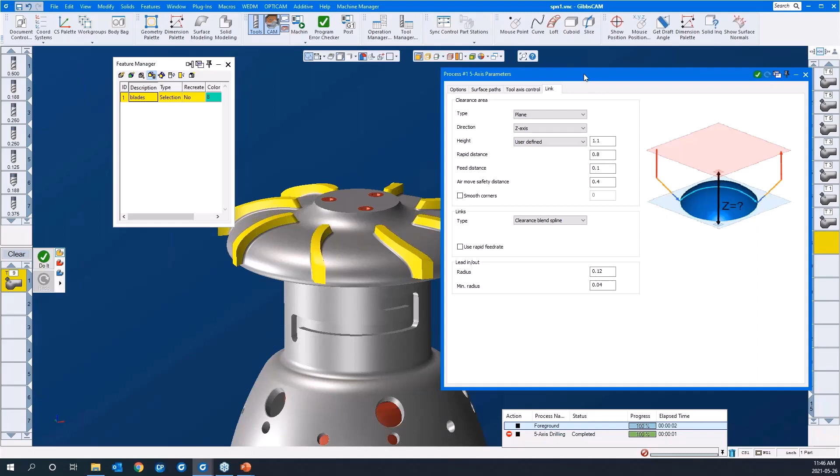One thing we're going to use, and it's available across the board, is this clearance blend spline, rather than an abrupt lift and over and then back down. It actually creates a nice curve reposition move, and you'll have a look at that here. I'll say do it.

Give it a moment to calculate. While it's calculating, GibbsCAM is multi-threaded. It allows you to continue on. I could develop new toolpaths. I can solid model, create a tool, what have you.

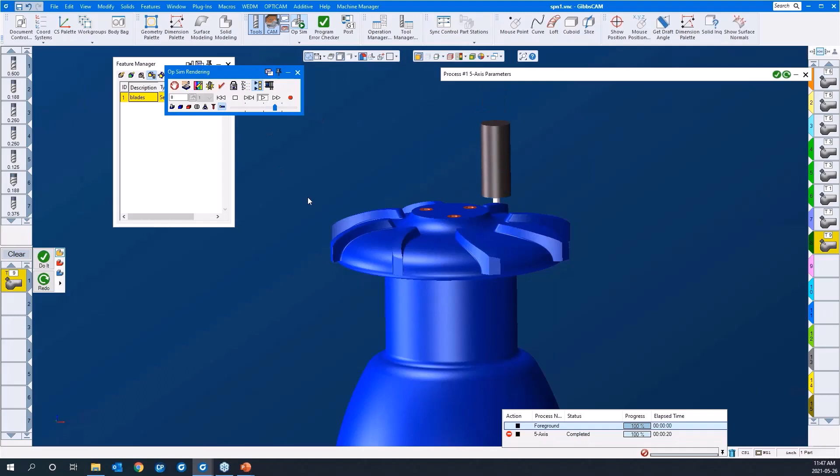I'll go back to OpSim here. But you can see those, and I'll make sure that we are fixed part like that. And hit play. So as it cuts down the walls, it actually tilts the tool away. You'll have a look at that.

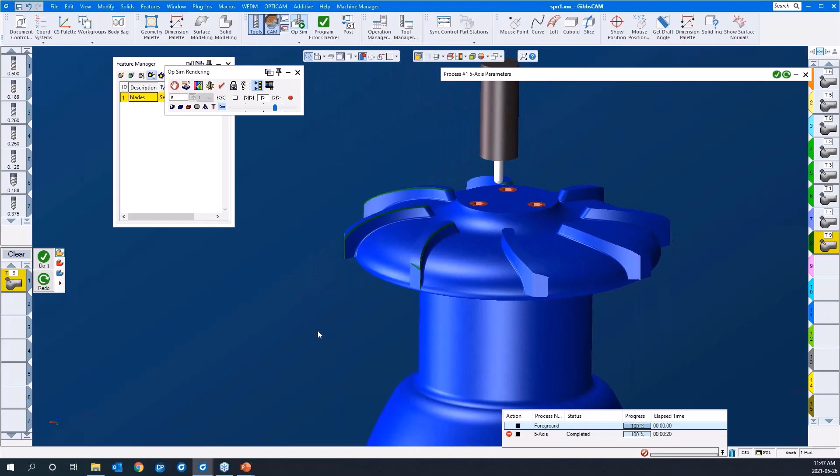So it's automatic deburring cycles, and then you just exclude what you don't want. Very powerful. And here's the clearance blend spline moves, okay? Again, nice soft repositioning moves, easier on your machine, okay?

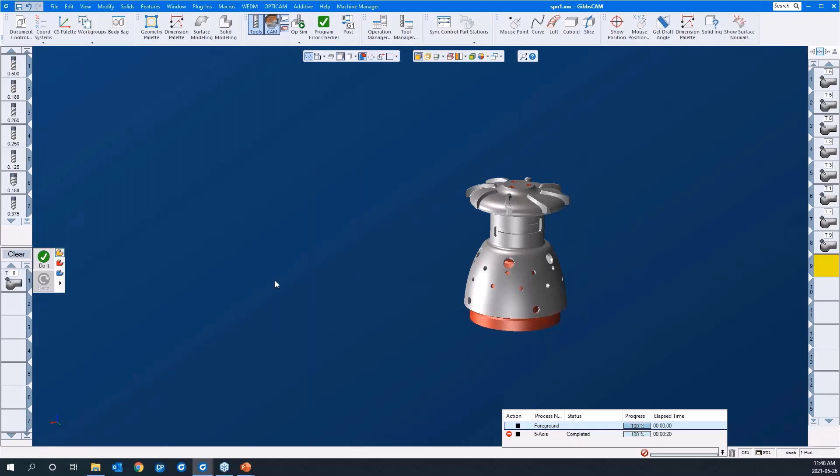We have one more toolpath we're gonna look at, and we're gonna wrap it up here. It's basically just a straight 3-axis finishing strategy. Okay, I'll load it from the process list here. It's called geodesic machining. You guys may have heard about this, but it makes just high quality toolpath options. Let's have a look at this.

Under surface paths, it'll be geodesic machining. And what that means is that it puts a geodesic mesh over any surfaces you select and then machines that geodesic surface. That's similar to triangle mesh, but the quality of the toolpath is just fantastic. So we never did focus on that surface there.

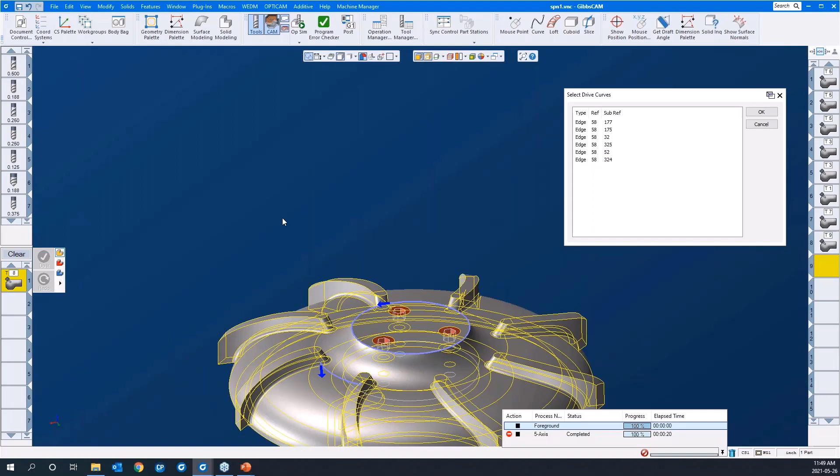I'll go drive curves. I'll pick this upper edge and the lower edge here. Okay, you can see that it didn't behave the way I wanted. So what I can do is just right click here and I'll go 2D chain rather, and double click on this edge again. And you can see it now chained it up the way I wanted. I'll include that one as well. Say okay.

Okay, we're going to spiral up or down based on whether we have flip step over on or off. If we are spiraling, you typically want to do a full pass or full contour at one depth at the beginning and end, and we'll continue with that. Here's your step over amount by step over or by ridge height. Tool axis control, in this case, we said 3-axis, gouge check only where required. Let's create the toolpath.

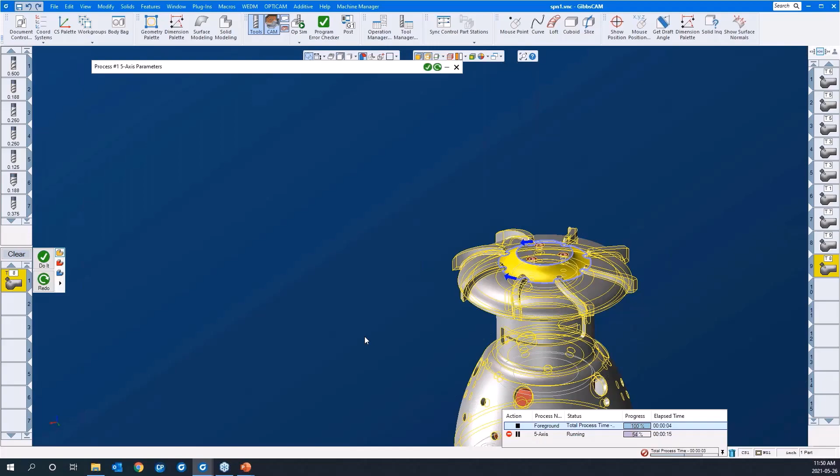I'll give it a moment or two to calculate, but very robust toolpath, very quick to calculate, very high quality. Something like that. Let that run. Something like that.

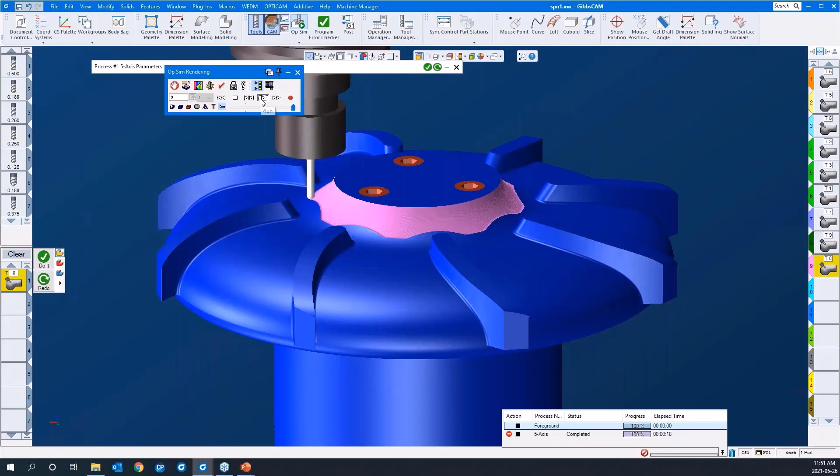So that's where we're going to end it off today, guys. As you can see, the 5-axis module in GibbsCAM is very powerful and easy to use. We used 5-axis strategies, we went to 4-axis, we went to 3-axis. Hopefully we showed you a lot in a short period of time. There's much more to it. This was only the tip of the iceberg. There's a lot left to certainly display.